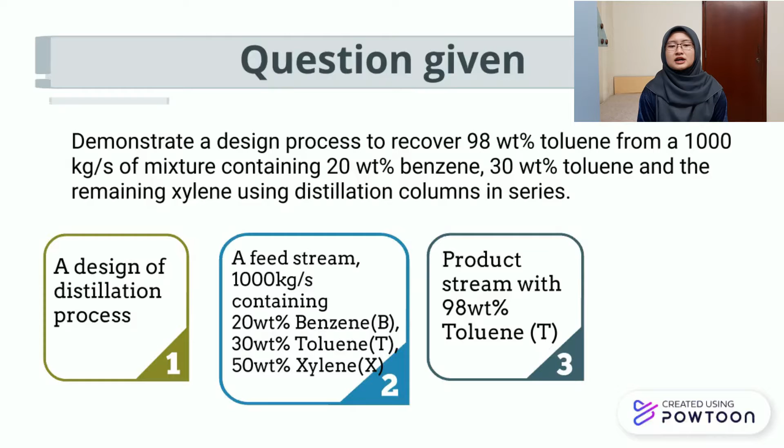So, the question given is to demonstrate a design process to recover 98% toluene from 1000 kg per second of a mixture containing 20% benzene, 30% toluene, and the remaining xylene, which is 50%, using distillation columns in series.

Chemical compounds involved: first, benzene, with a molecular formula of C6H6 and boiling point of 80 degrees Celsius. Second, toluene, molecular formula of C7H8, boiling point of 110.6 degrees Celsius. Third, xylene, with a molecular formula of C8H10 and boiling point of 139 degrees Celsius, the highest. So our design process is called the BTX distillation process.

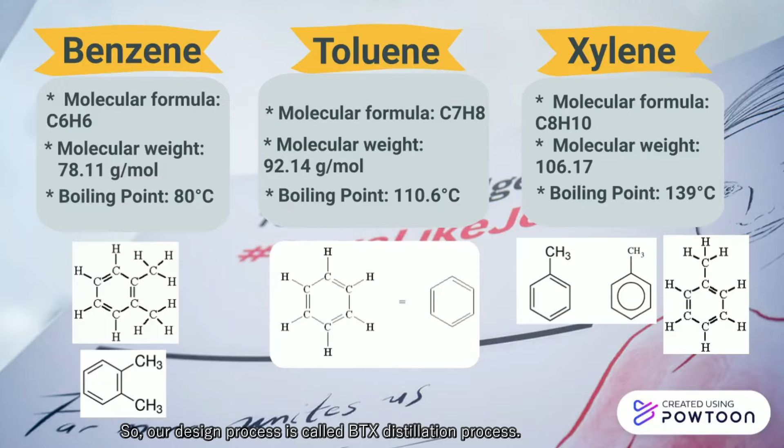Our distillation sequence for the separation of benzene, toluene and xylene will be in direct sequence, in which the bottom product stream of the first distillation column will be the feed to the second distillation column.

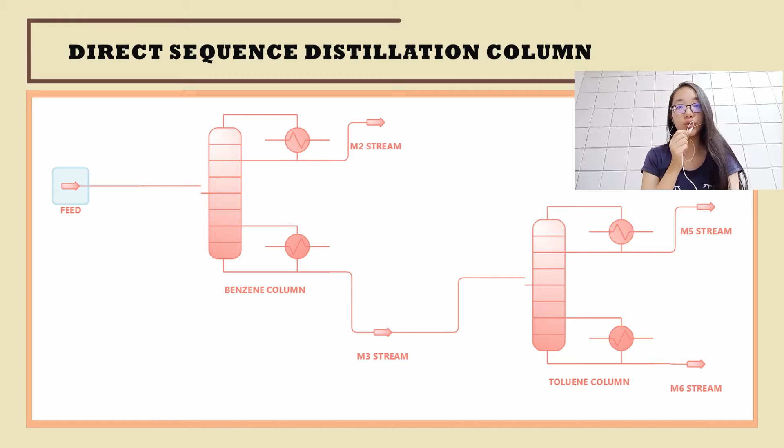According to Thermopedia, the most common column diameter is about 2.5 meters and column height is about 30 meters. For the assumption, pressure is constant at 1 atm throughout the whole distillation process.

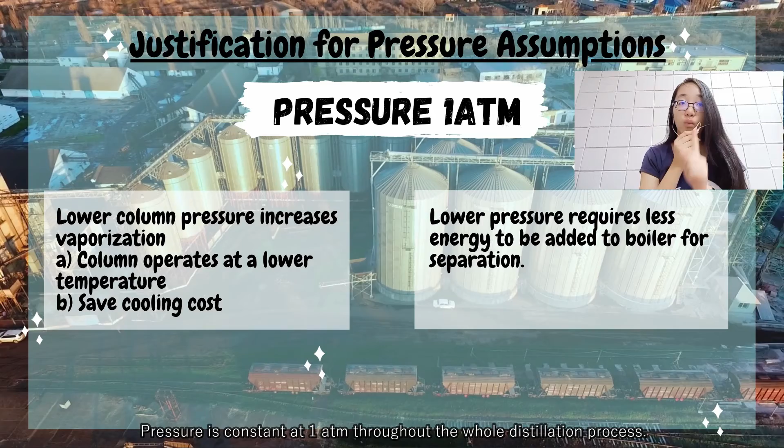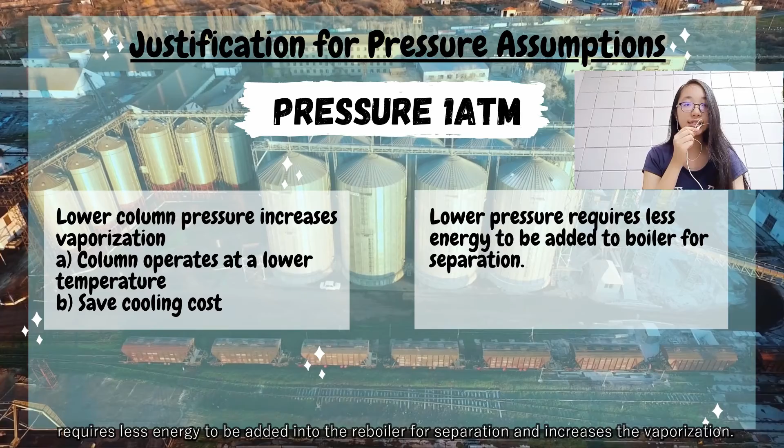Distillation at steady state has a fixed pressure and only temperature is changed to regulate the composition of the product stream. Lower pressure requires less energy to be added into the reboiler for separation and increases the vaporization.

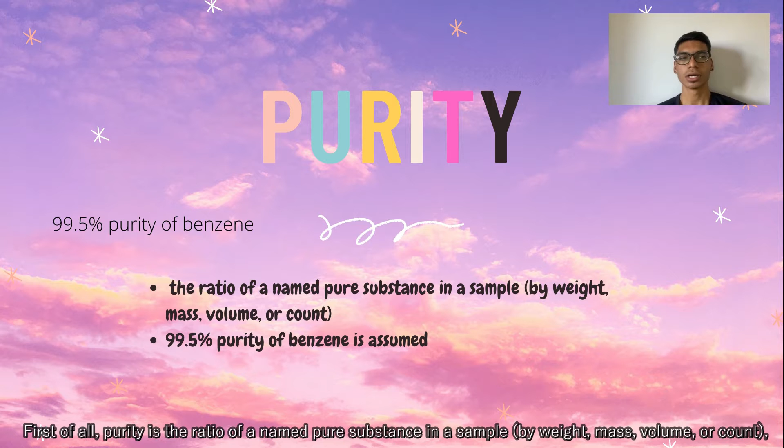First of all, purity is the ratio of a named pure substance in a sample by weight, mass, volume or count. It is a number between 0 and 1, typically expressed as percent, per mil, and fraction.

In this process, 99.5% purity of benzene is assumed, which indicates that 99.5% of the benzene mass flow rate will be formed in the top product stream, while 0.5% of impurities are contained in the benzene product.

Percent recovery computes the percentage of an original substance that is recovered after a chemical reaction is completed. This mainly includes purification reactions. It also determines the efficiency.

According to the BTX extraction technology article, typical recovery of benzene and toluene is at least 99% and 97% respectively. To have higher recovery, slightly more energy is needed. In this BTX distillation process, 99% benzene recovery and 98% toluene recovery are assumed, meaning 99% of the benzene and 98% of the toluene in the feed will be converted into the product stream.

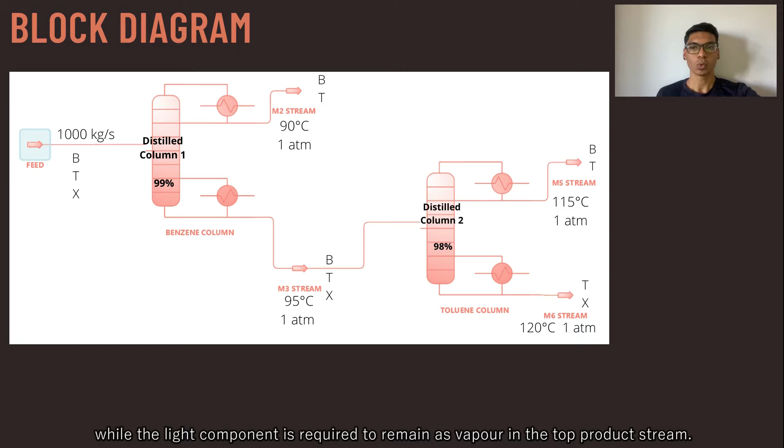This process is in steady state and it is a non-reactive system. The heavy component is preferable to remain as liquid in the bottom product stream, while the light component is required to remain as vapor in the top product stream.

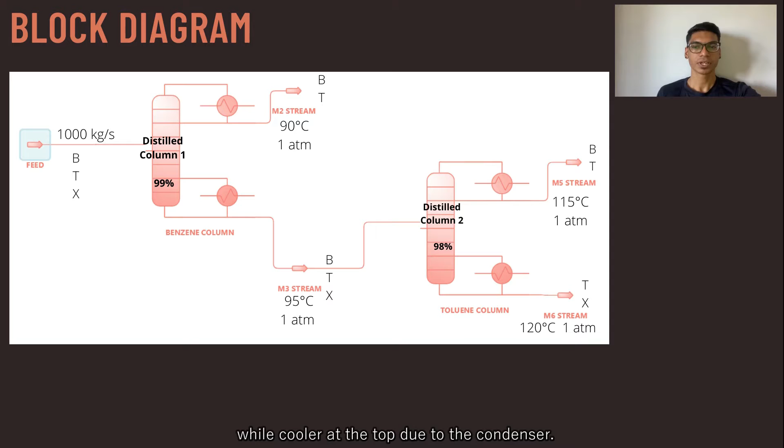The typical temperature profile will be hotter at the bottom due to the reboiler, while cooler at the top due to the condenser. From this design, we have benzene as the lighter component with a boiling point of 80 degrees Celsius, toluene with a boiling point of 110.6 degrees Celsius, and xylene with a boiling point of 139 degrees Celsius.

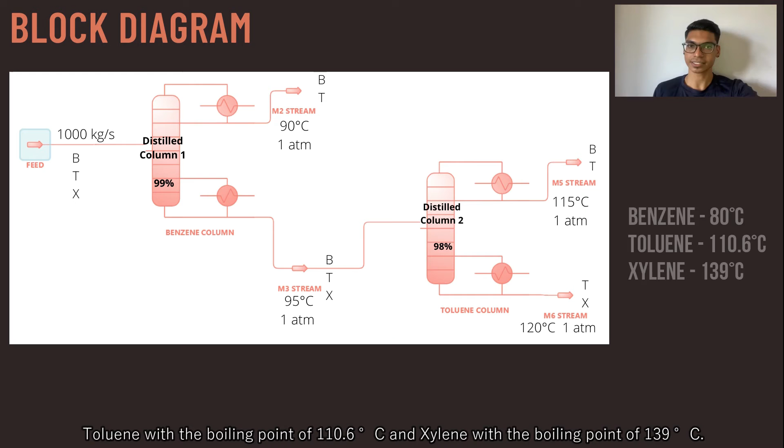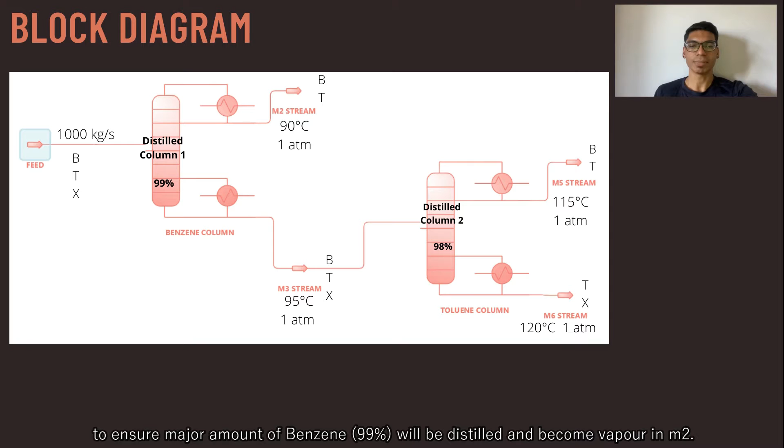The assumptions for temperature are based on the boiling point of the components. So from the first distillation column, we can see that the temperature is 90 degrees Celsius on the top stream to ensure a major amount of benzene, 99%, will be distilled and become vapor in M2.

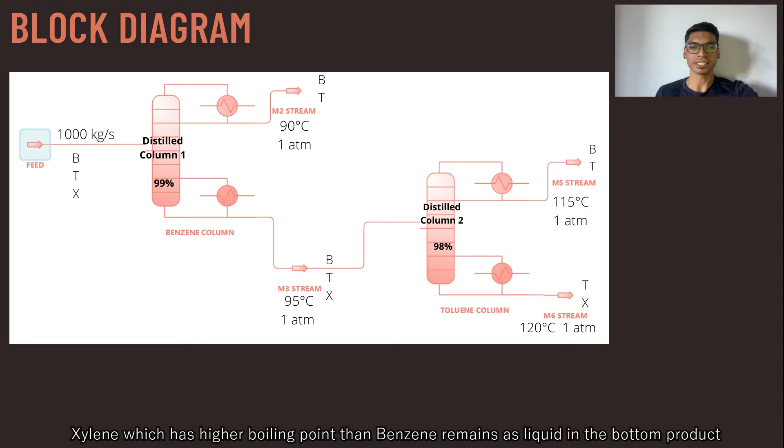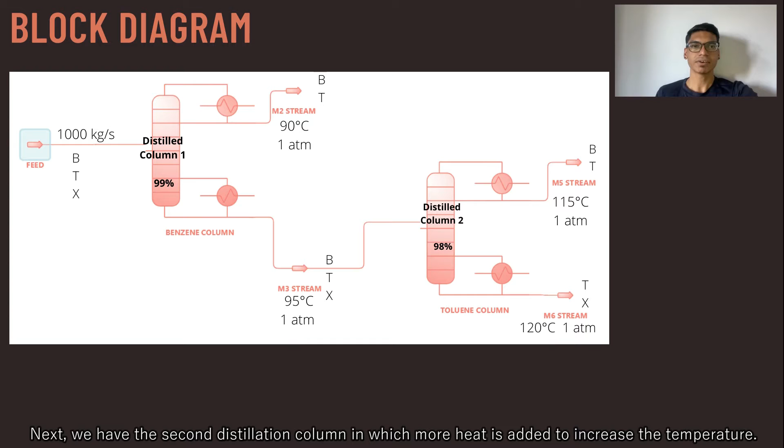A minor amount of toluene will change into vapor phase in the top product stream. Xylene, which has a higher boiling point than benzene, remains as liquid in the bottom product since its boiling point is not achieved. The temperature for the bottom stream is slightly higher than the top stream, assumed to be 95 degrees Celsius. Next, we have the second distillation column in which more heat is added to increase the temperature.

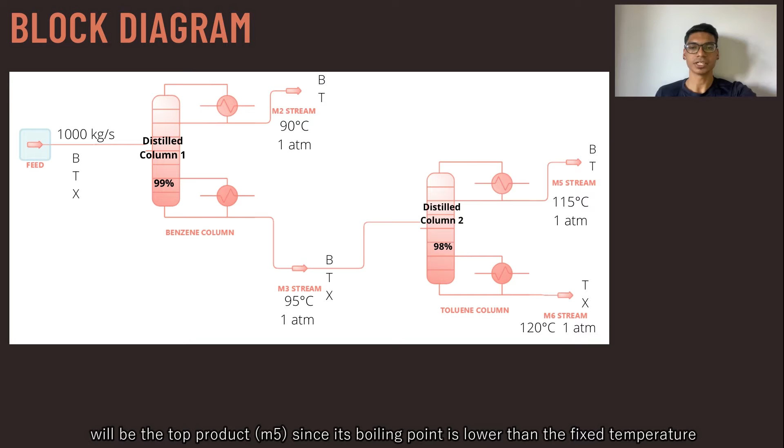The temperature is 115 degrees Celsius in the top product stream. In this column, both benzene and toluene will be the top product since their boiling points are lower than the fixed temperature and will turn into vapor phase.

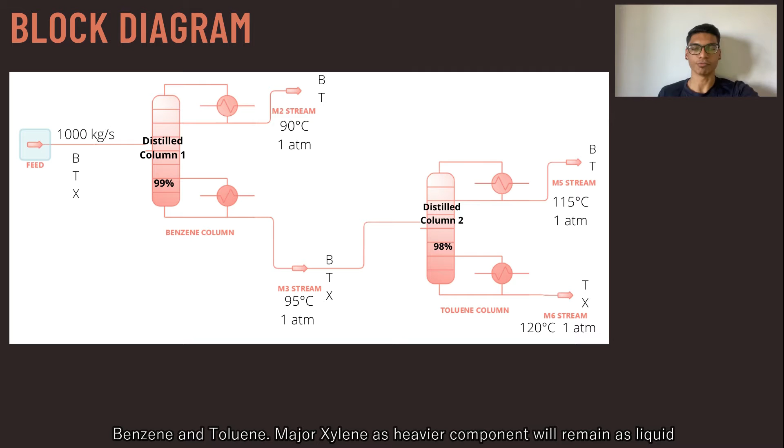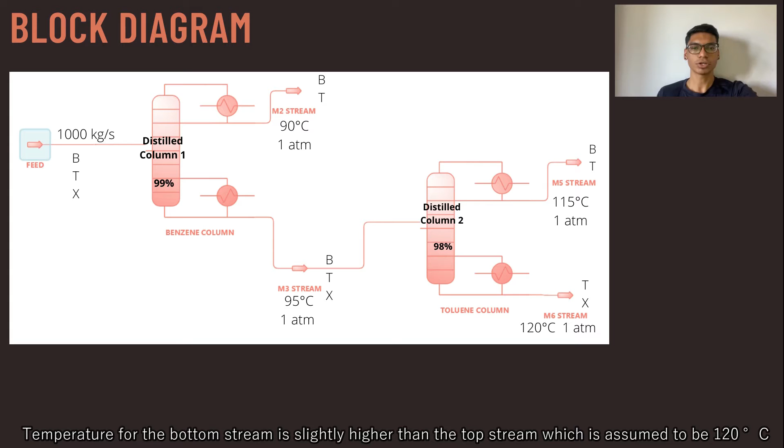At the same time, minor xylene will be distilled at the top product due to cohesion forces between molecules of benzene and toluene. Major xylene, as the heavier component, will remain as liquid at the bottom since xylene has a higher boiling point than the column temperature, which is 139 degrees Celsius. The temperature for the bottom stream is slightly higher than the top stream, assumed to be 120 degrees Celsius.

Now let us move to the calculation part. In this part, the concept applies the law of conservation of mass. According to this law, for any process unit, mass can neither be destroyed nor created, but it can change from one phase to another or be converted into other forms through a reaction process. Hence, it can be concluded that the total mass input will equal the total mass output.

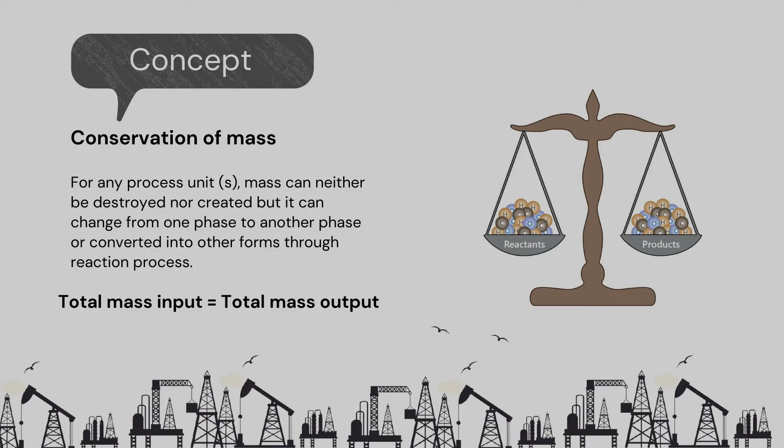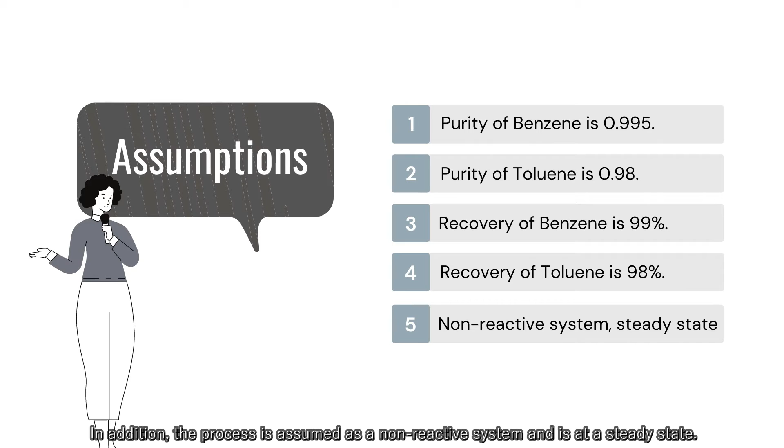In addition, the process is assumed to be a non-reactive system and at steady state. Therefore, the accumulation equals 0, and there is no consumption or generation. The input will be equal to the output.

In the process flowchart, letters B, T, and X represent benzene, toluene, and xylene respectively. M with a dot above is the mass flow rate of each stream, and the mass fraction of each component is stated below the stream. The condenser and the reboiler are neglected in the calculation part.

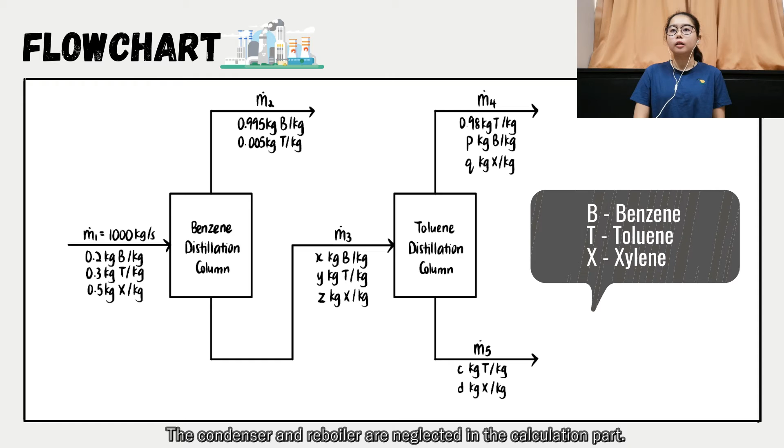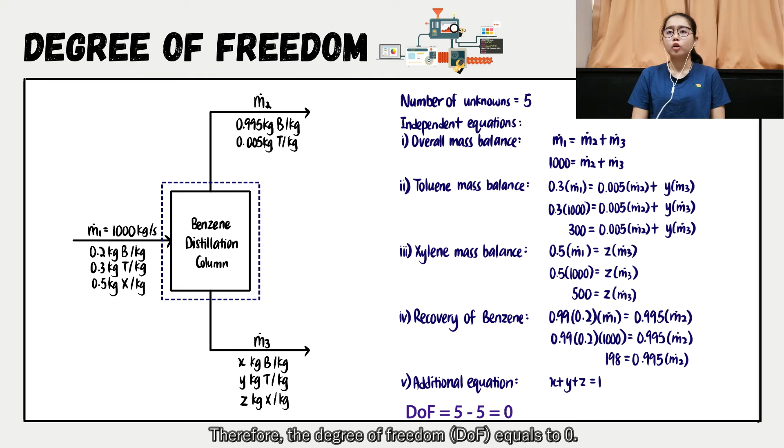Before we solve the question, let's calculate the degree of freedom. For the first distillation column, there are 5 unknowns in total along with 5 independent equations, so the DOF equals 0. For the second distillation column, there are 10 unknowns, but only 7 independent equations that we can come up with, so the DOF is equal to 3.

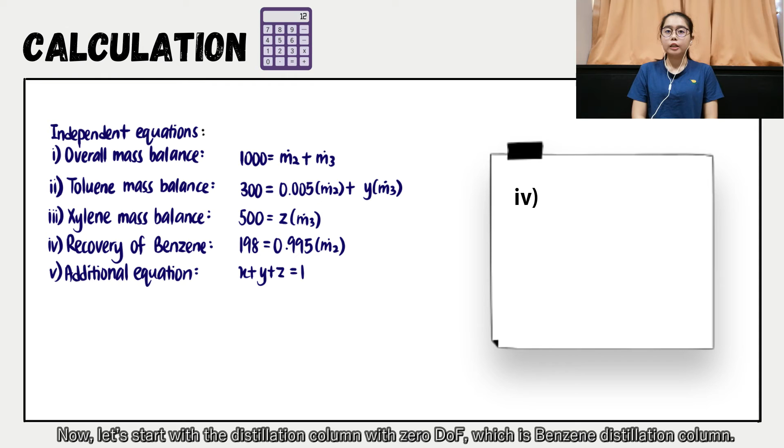Now let's start with the distillation column with 0 DOF, which is the benzene distillation column. From the fourth equation, we can get the value of M2, which equals 198.99 kg per second. Then from the first equation, we can know that M3 equals 801.01 kg per second. After that, Z can be calculated, which equals 0.6242.

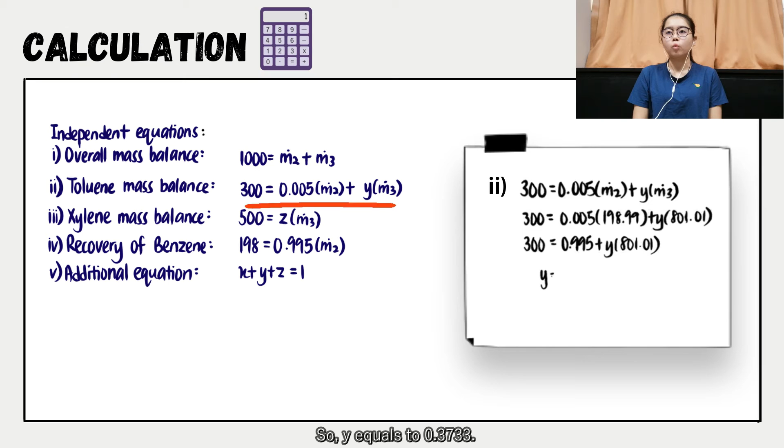Since the values of M2 and M3 are known, we can calculate Y using the second equation, so Y equals 0.3733. Lastly, since X plus Y plus Z equals 1, X equals 0.0025.

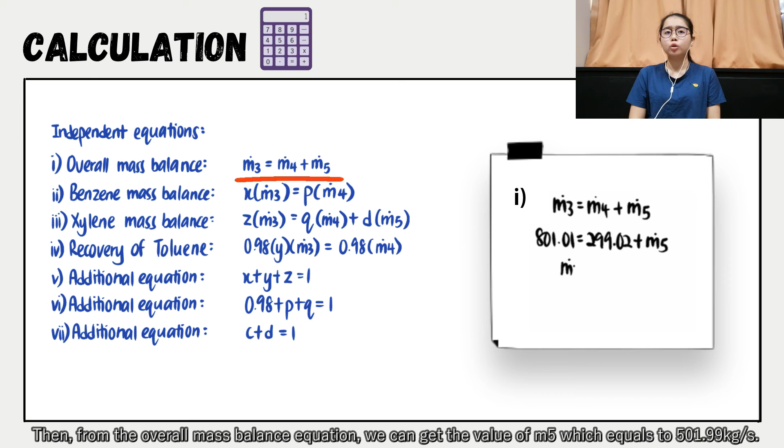Now let's continue with the second distillation column. Since we know the values of Y and M3, we can calculate M4 using the fourth equation. Then from the overall mass balance equation, we can get the value of M5, which equals 501.99 kg per second. After that, the value of P is calculated using the second equation.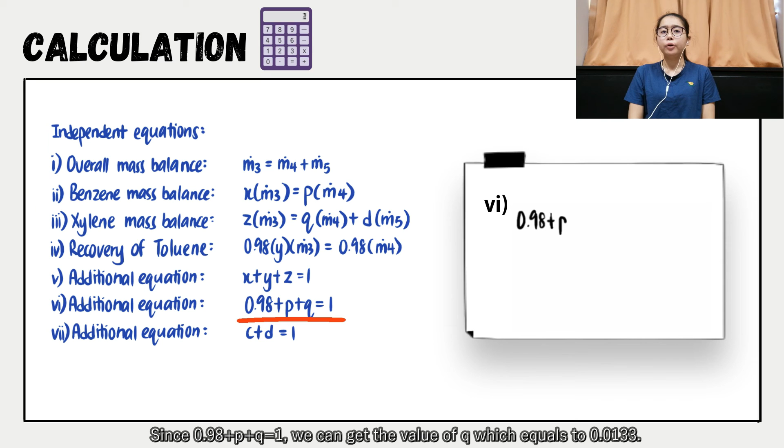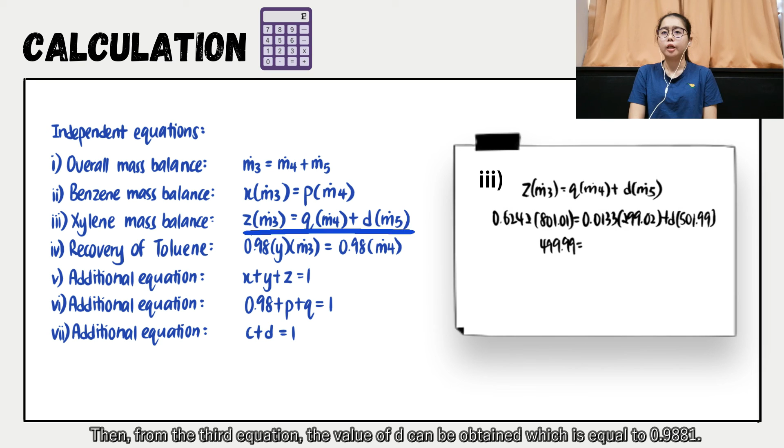Since 0.98 plus P plus Q equals 1, we can get the value of Q, which equals 0.0133. Then from the third equation, the value of d can be obtained, which is equal to 0.9881. Lastly, we can also calculate the value of C, which is equal to 0.0119.

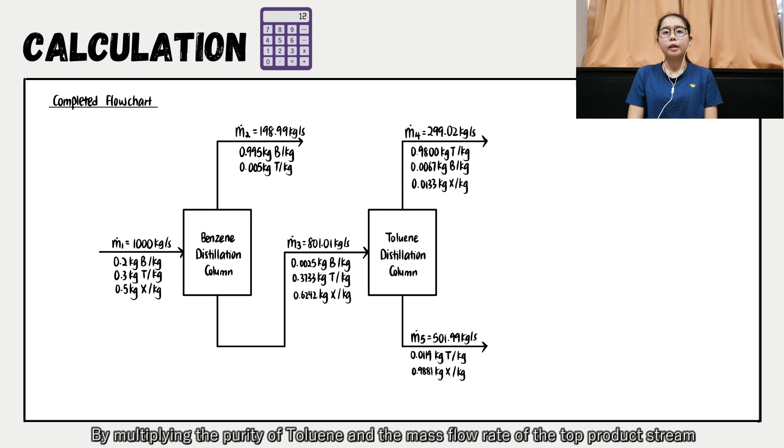Since all the unknown values have been calculated, a complete flowchart can be obtained. By multiplying the purity of toluene and the mass flow rate of the top product stream of the second distillation column, we can know the amount of toluene, which equals 293.04 kg per second.